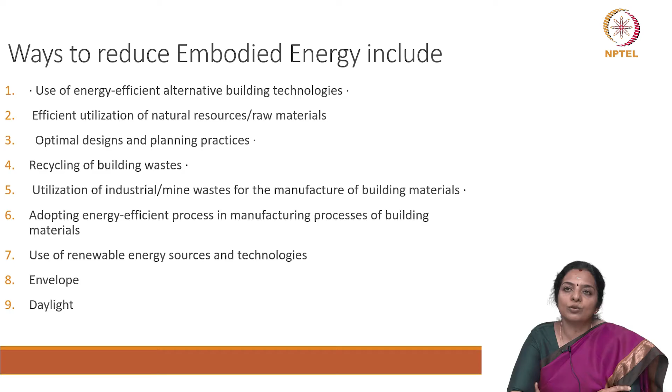We also saw the use of energy efficient alternate building technologies. We had a glimpse of efficient utilization of natural resources and raw materials. We saw how earth-friendly materials can be used in architecture. What are the optimal designs and planning practices? What is the significance of recycling of building wastes and the utilization of industrial or mine waste for the manufacturing of building materials? How adopting energy efficient process in manufacturing of building materials help us reduce embodied energy of those building materials? What is the use of renewable energy sources and technologies in reducing operational carbon?

Now, why is reduction in energy consumption in buildings so important? Now, as centers of our social and economic lives, buildings are also the source of a great share of our environmental impact. The International Energy Agency, IEA, estimates that nearly 60% of the world's electricity is consumed in residential and commercial buildings. The building sector is responsible for 1/3 of the total resource consumption globally. And the Intergovernmental Panel on Climate Change, IPCC, estimates that by the year 2030, greenhouse gas emissions from buildings will account for over 1/3 of the total emissions.

But the building sector represents a hugely untapped potential for emission reductions. With proven and commercially available technologies, energy consumption in both new and existing buildings can be cut by at least 30 to even 50% within the lifespan of the building. The United Nations Environment Programme has stated that no other sector has such a high potential for drastic emission reduction, and that the built environment offers some of the most cost-effective and expedient ways to contribute to climate change mitigation.

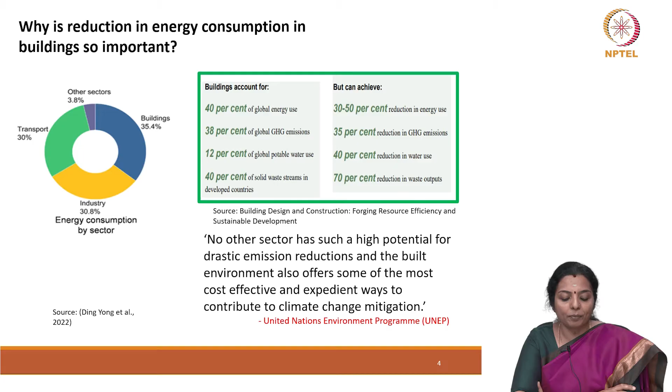The consumption of energy and emission of carbon in buildings is made up of two types. One is the embodied energy and another is the operational energy. Now, in India, the real estate and the construction sectors account for about 32% of the total greenhouse gas emissions, and these cover both operational and embodied carbon. Currently, Indian buildings account for over one third of the total annual carbon emissions, and these are projected to emit 7 times more carbon by the year 2050 as compared to the year 2005. However, forward looking built environment players are increasingly backing the move towards net zero and ambitious sustainability commitments.

India's real carbon saving potential lies in the assets that are yet to be built. Estimates suggest that about 70% of India's 2030 urban infrastructure is yet to be built, which highlights the need to minimize the associated embodied carbon. Currently, governments and private stakeholders are largely focused on reducing operational carbon emissions, while in comparison, embodied carbon remains more challenging to track. It is also difficult to track the embodied carbon emissions and also to record and report.

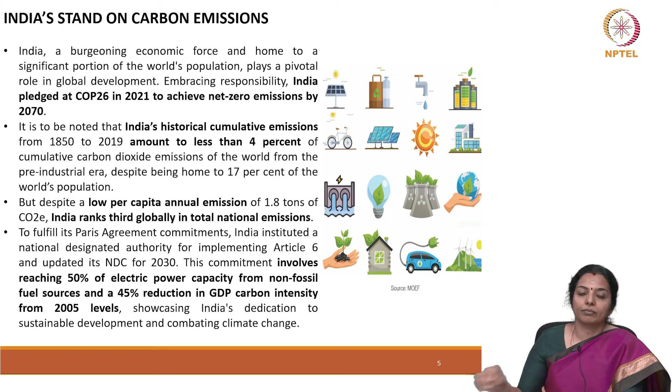Nearly one third of the sustainable development goals set forth by the United Nations rely on the building and real estate industries, either directly or indirectly. With such a critical role by the building industry to achieve the National Sustainable Development Goals by the year 2030, our government has established many important and notable programs, such as the Pradhan Mantri Awas Yojana and the Smart Cities Mission. Hence, a significant quantity of building construction is expected in the upcoming years. Unless we very consciously apply all that we have discussed, the chances of reduction in carbon emissions are very minimal.

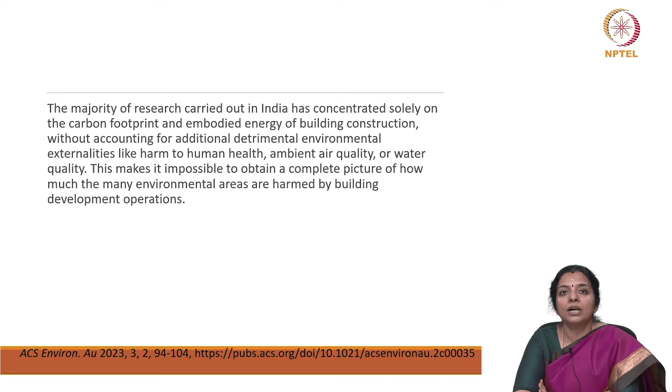The majority of research carried out in India is concentrated largely on the carbon footprint and embodied energy of building construction. This does not account for additional detrimental environmental externalities like harm to human health, quality of ambient air, and quality of water. This makes it impossible to obtain a complete picture of how much the many environmental areas are harmed due to the building development industry.

In the next few years, a very important quantity of building construction is anticipated in economically emerging countries such as India. Understanding how these buildings will affect the many environmental domains is the first step towards making sure that new construction is done in a sustainable manner. The stage of material manufacture has the largest impact on a building's overall environmental footprint. The choice of building materials at this stage becomes very important, and therefore we need the support of the clients, the architects and designers, and the civil engineers to pitch in and welcome renewable and earth friendly building materials.

Material transportation also consumes a lot of embodied energy. One needs to therefore focus more on locally available building materials and also look at earth friendly transportation methods to the construction site. The building materials which are very high in embodied energy are cement, steel, glass, aluminum, brick, and plastic. These are the widely used building materials today. As architects and designers, you need to rethink the usage of high quantum of these building materials.

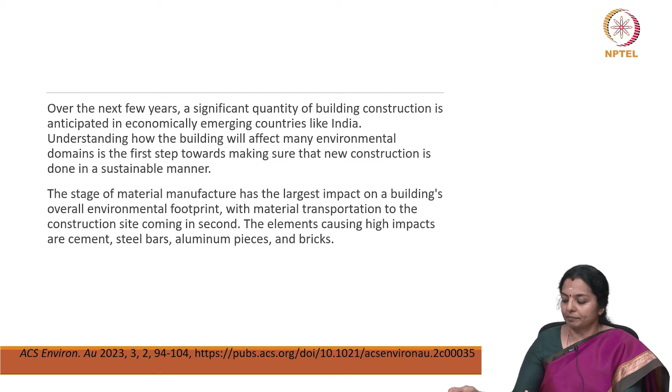Since buildings in India account for 35% of all energy generated, the first environmental effect category, energy use, relates to the nation's Sustainable Development Goal number 7, which is improvement in energy efficiency. The second impact category, global warming potential, measures how human caused greenhouse gas emissions affect the atmosphere's ability to absorb heat radiation, or radiative forcing. This raises Earth's temperature, which has a negative impact on ecosystem health as well as human health.

Massive volumes of greenhouse gas emissions occur during the production and processing of building materials such as steel, concrete, glass, cement, bricks, etc., and during construction operations using inappropriate fuel. This must be taken into consideration when one chooses a building material. This metric is crucial for monitoring the nation's advancement towards Sustainable Development Goal number 13, or climate action.

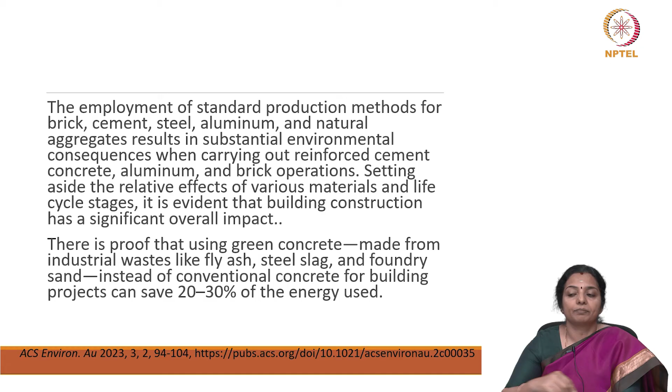There is substantial proof that using green concrete made from industrial waste like fly ash or steel slag and foundry sand instead of conventional concrete for building projects can save 20 to 30% of the energy used. It is possible to decrease energy use, reduce carbon emissions, and reduce air acidification and particulate matter emissions by 70 to 90% by using locally and naturally occurring cob earthen material such as clay, sand, straw, and the other renewable materials that we have seen during the course of this study.

Instead of using conventionally processed high energy intensive building materials such as concrete masonry, one can really look at alternate building materials. When compared to traditional concrete, carbon emissions can be reduced by employing concrete constructed from recycled concrete, industrial or agricultural byproducts, recycled crushed clay brick aggregate, and cement, replacing these materials with rice husk ash, palm oil fuel ash, and palm oil clinker powder.

The use of diesel during material transportation to the site and for operating various machinery during on-site building construction is the single biggest contributor to the life cycle impacts, apart from building materials. In order to address this, some of the possibilities that need to be investigated in the future include the use of alternative greener fuels like ethanol, more efficient heavy duty vehicles, battery based trucks, and logistical efficiency.

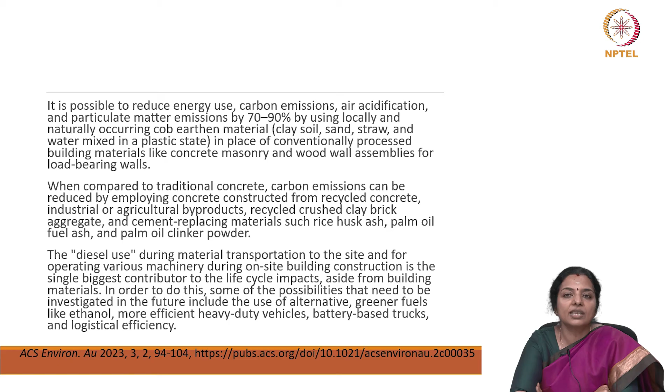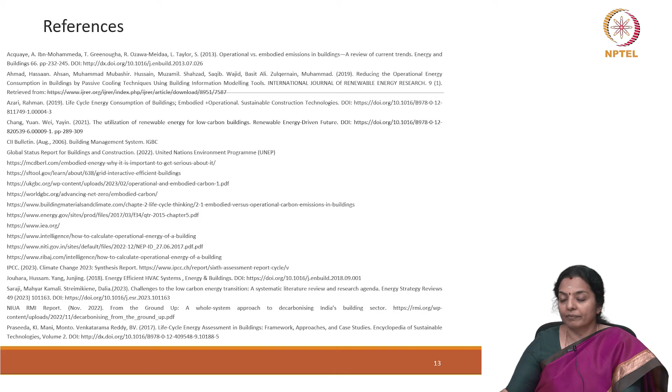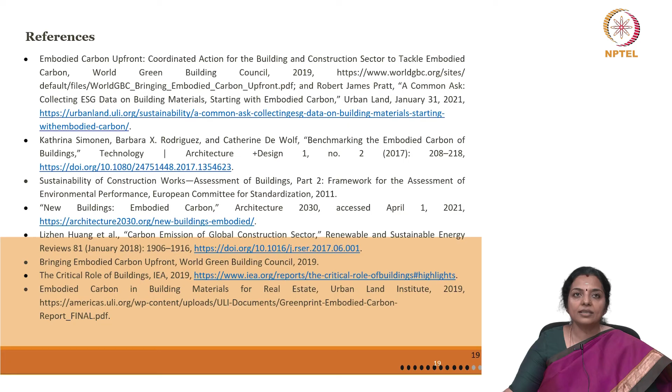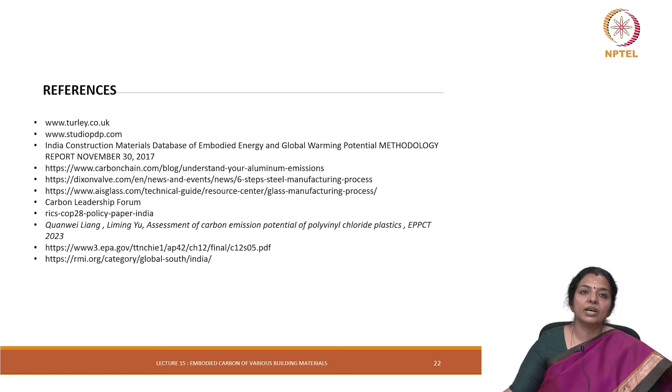So what we have seen during each of these classes that we have taken all amounts to this: architects, designers, civil engineers, and clients have a huge role in reducing greenhouse gas emissions and global warming. This can be done first through understanding whether there is a need to scale up the project or to downscale the project. The architect plays a crucial role in counseling the client to have a scaled down, build less approach.

Even when one has to build, try to look at the options that you have in terms of building materials and construction technology. Try to go for renewable building materials. Try to go for locally sourced building materials. Adopt all simple passive techniques. Try to adopt advanced passive techniques. I have not covered advanced passive techniques in this course, and I have only hinted upon simple passive techniques. These two could form part of another course where simple and advanced passive techniques can be taught in detail, all aiming towards reduction in embodied energy and operational energy.

Also try to design building envelopes which are sensitive to climate. We have hinted upon low energy envelopes. Lighting consumes a large part of energy. Try to avoid artificial lighting and replace it with natural daylight. This can be done by appropriate design. If artificial lighting is needed, one should go in for energy saving fixtures. Overall, look at the building in a holistic manner such that the embodied carbon and operational carbon emissions are very less, because that is the way forward for decarbonization of buildings in India.